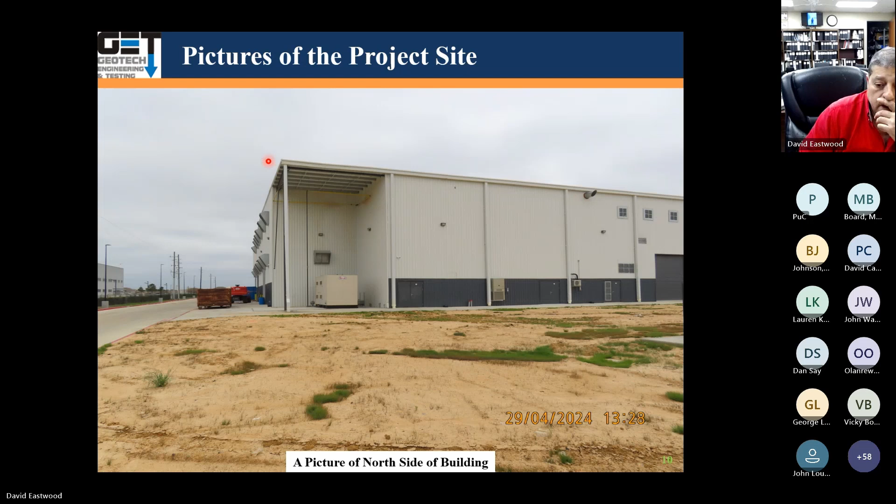Anyway, this is the building, southeast side. That's the north side of the building, and northwest. You can see it's a big metal building.

Project timeline. The agenda today is project timeline, site visit, field exploration, results of laboratory tests, engineering analysis, reasons for foundation distress, repair techniques, and recommendations for additional studies for this project.

The owner came to us on this project and told us, hey, we've got a building where the floor slab is all cracked up, and we're going to have problems operating on these floor slabs. What caused it, and how do we fix it? So we went out there and looked at the paperwork on the project.

September 11, 2020, they did the architectural drawings. The civil drawings came out in May of 2021. In August, the specifications for construction of the manufacturing building were put together. January 2022, construction started - that's important. In 2022, it was kind of a drought year; they didn't have that much rain. July 2022, structural drawings were completed, and construction was completed in August 2023.

February 2024, Geotech Engineering and Testing was engaged to work on the project.

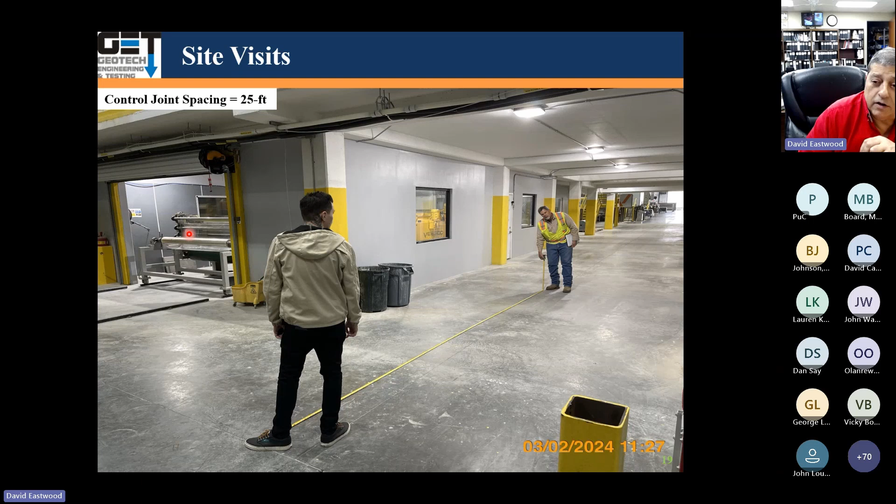Specs called for a maximum of 20 feet spacing. We measured joint spacing of 25 feet in a lot of locations, and of course the higher the spacing of the control joints, the more potential for floor slab cracking. Here, in this one, it's about 25 feet.

There were a lot of loads out there on the floor slabs - these are heavy items filled with rock, sitting on the floor slabs. They have a contact pressure of about 600 psf. We calculated the settlement - it was not that heavy.

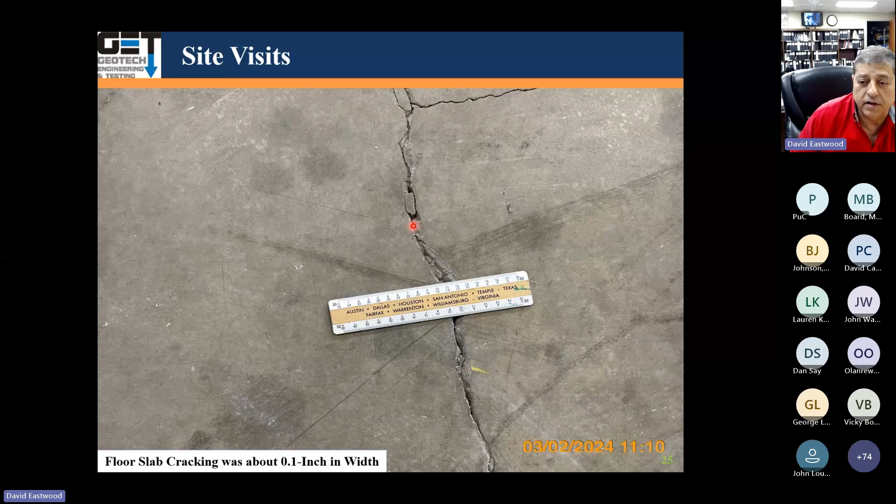A lot of floor slab cracking. You go through the whole floor slab area and you can see cracks all over the place - just cracks throughout the whole floor slab areas.

Crack, crack, crack, all the way from hairline to about 0.1 inch. Essentially, this building was only about 2 years old and just kind of falling apart.

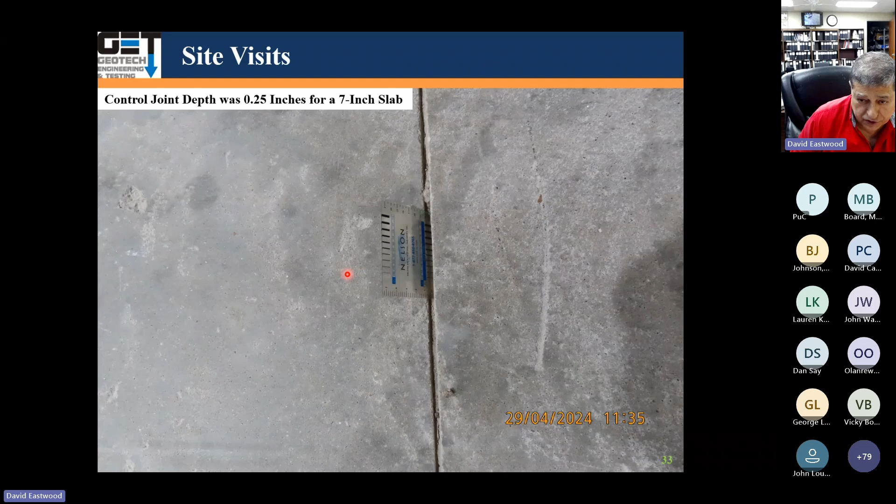Control joint depth was 0.25 inches. As we know, the control joint depth should be one-quarter of the floor slab thickness. The slab here was 7 inches, so it should have been more than 1.5 inches deep, but it was only 0.25 inches.

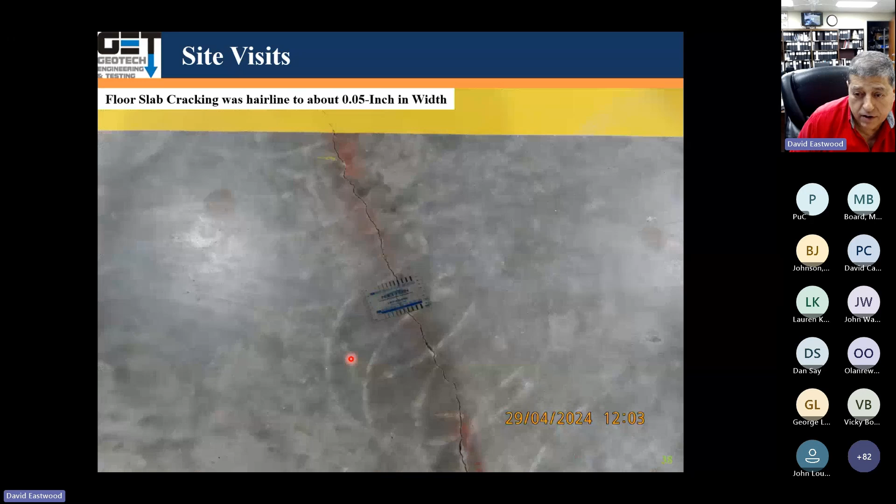Now, ACI has specs on control joints for industrial buildings, and I'm going to talk about that in a minute.

More cracks, more separations of the control joints, more cracks.

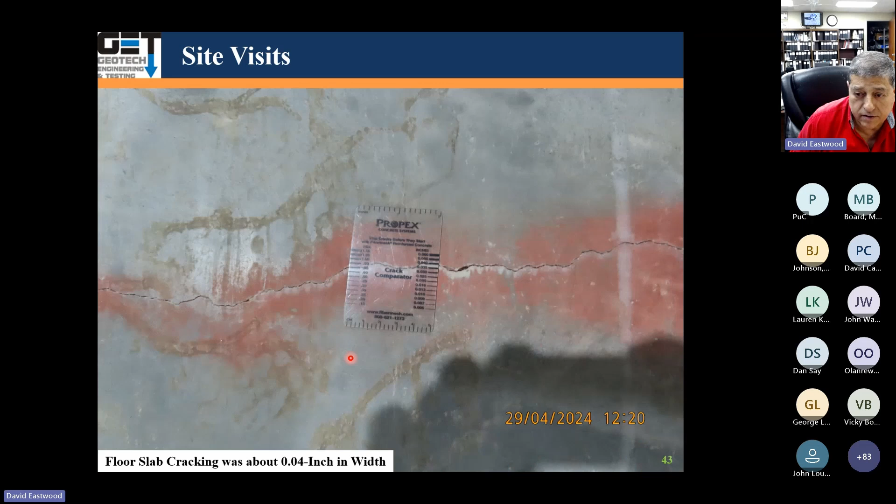So we monitored this, trying to see if this press machine's vibration was causing concrete cracking.

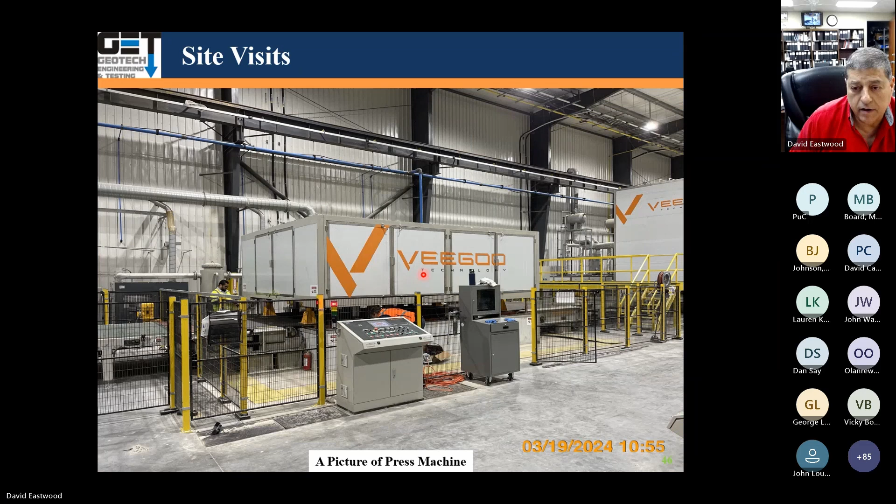Looking at the foundation system for the control machine, for the press machine, it's basically sitting on a concrete mat foundation, having foam rubber in between its foundation and the rest of the foundation of the building to increase damping of the vibration. So that's kind of like an isolation joint and damping material.

Also, they had an oven on the project, and the oven had a basement. You had to go in there. It was hot in there, and all the walls were leaking. You go inside, look at the walls, and all the water is leaking in the basement. The walls, the water was just leaking inside the floor slabs.

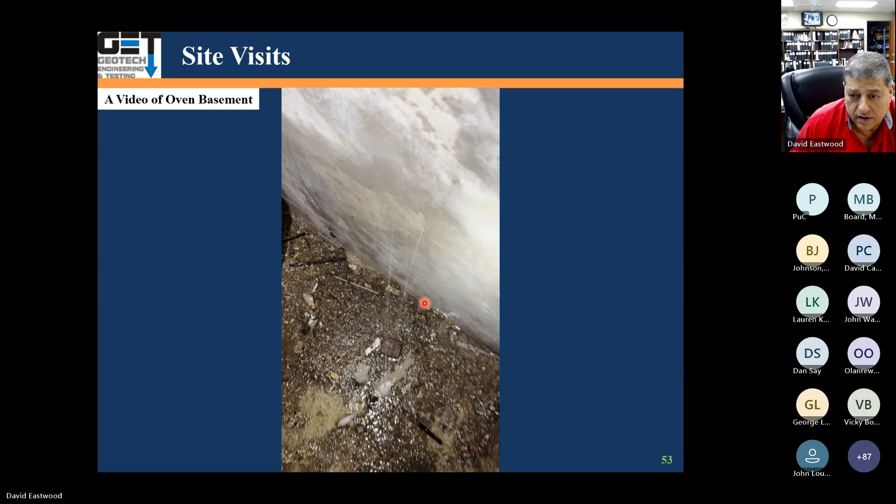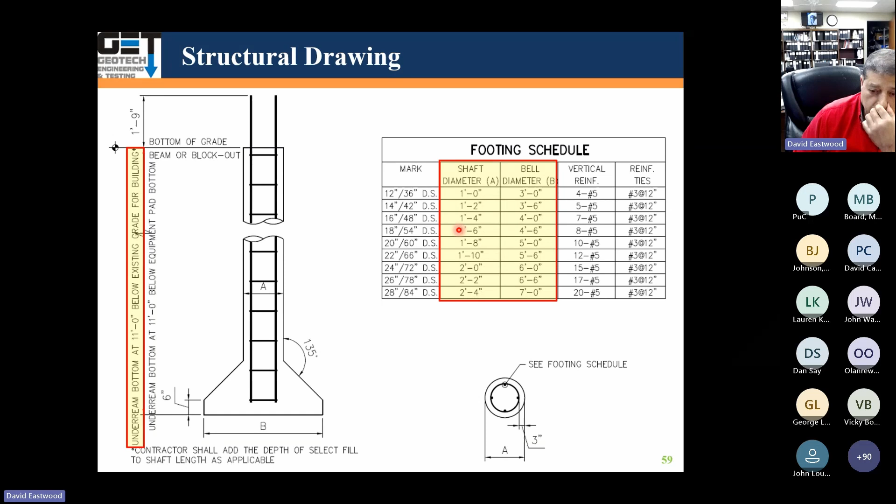And then the slab itself, which is critical here, was supposed to be 7 inches with number 4 at 15-inch spacing, reinforcing in the floor slab areas. And here it says in the spec, building placed control joints at maximum of 20 feet. And of course, we measured at many locations that the control joints were measured more than 20 feet.

So we went out there, did some investigation of the floor slabs. We did some drilling, sampling. We did ground penetrating radar, GPR. We did micro elevations. We did vibration monitoring with geophones. We're putting piezometers in there to see where the water is underneath the floor slabs, and we did the crack survey.

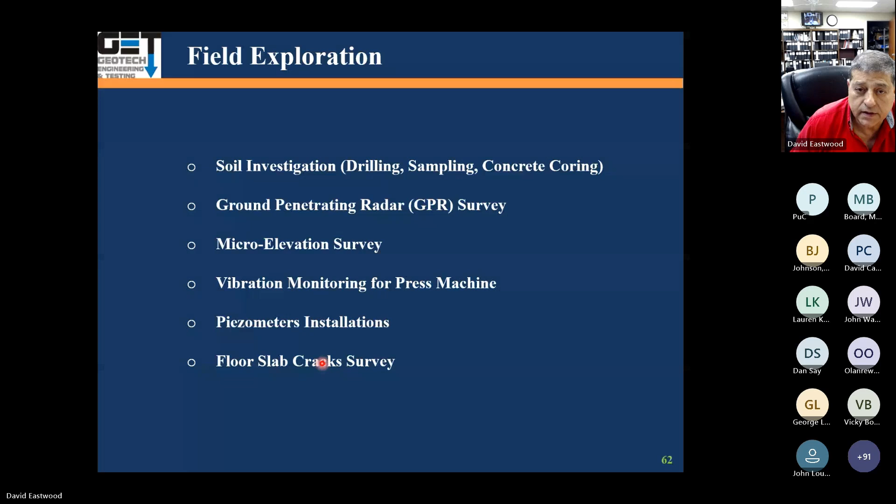So when we did our borings on the building, we did 4 borings, 25 foot on the exterior of buildings, and 8 borings inside the building to a depth of 20 feet or where we could get it. We also did GPR inside the building at 8 locations to identify the concrete thickness and rebar layout. Then we did piezometers, 2 of them inside the building. The exterior borings, we had our own rigs going out there doing borings and trying to get samples of the soils with the building. The soils under the building were mostly sandy clay, lean clay type material.

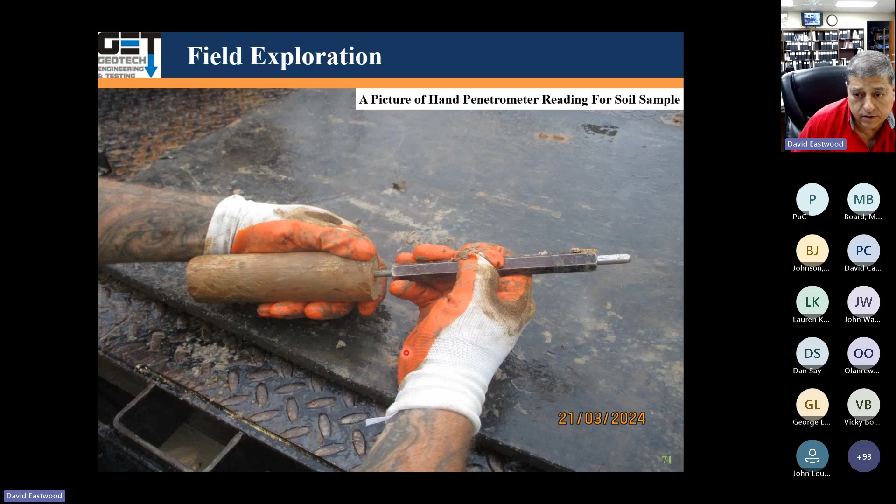They were good soils, non-expansive, with low PI soils. We checked the water level with the tape measure and the weight at the end of it. There was no water all the way down to 20 feet.

With the GPR, it's a device we use a lot in forensics. Basically, we use it for evaluation of presence of underground utilities, damage prevention, if there is any problem with any kind of pipes underneath the building. GPR uses basically an antenna that transmits electromagnetic energy, similar to a cell phone. A receiver is located within the antenna and takes the reflected signal as it encounters soils with 2 different dielectric values.

So GPR was used at 8 locations. Basically, the purpose of it was to identify underground utilities. Also, we wanted to know the thickness of the concrete floor slab and rebar layouts. So also, we did it throughout the whole building to see if there were voids underneath the floor slabs and areas of high moisture.

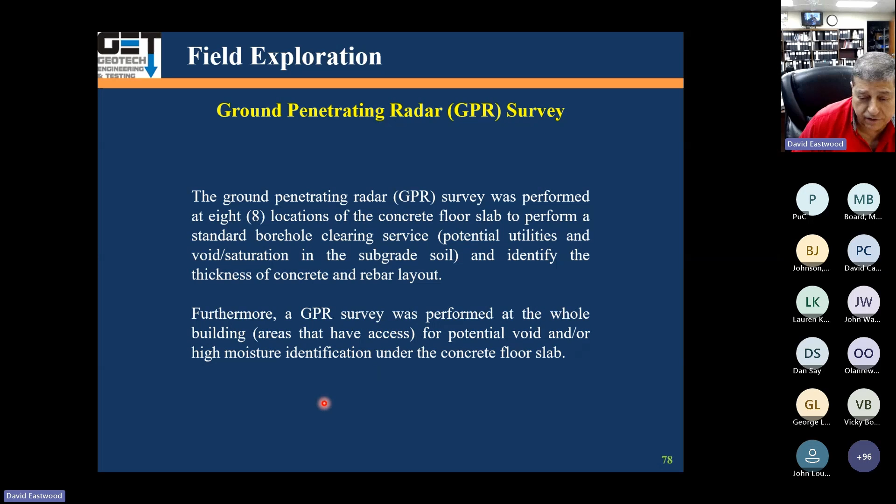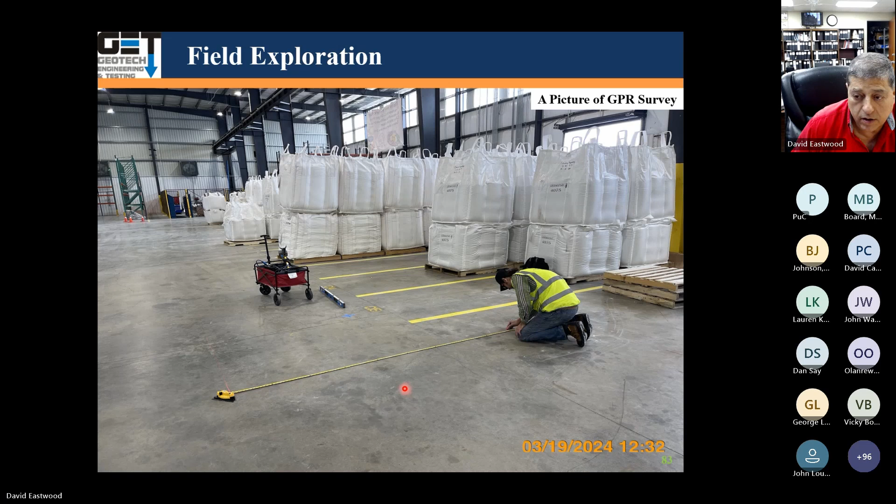This is again more boring locations using GPR, making sure there's no steel here. There's some rebar here. Again, the rebar locations and the boring location here. We don't want to drill where the rebars are.

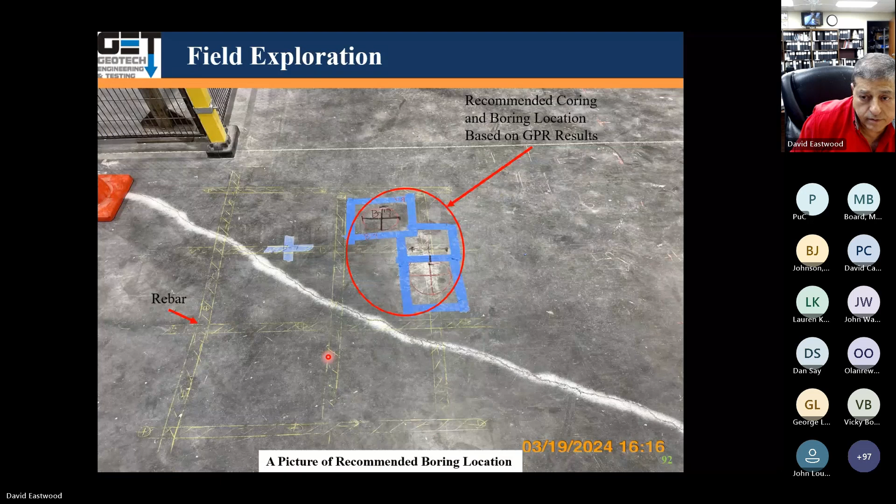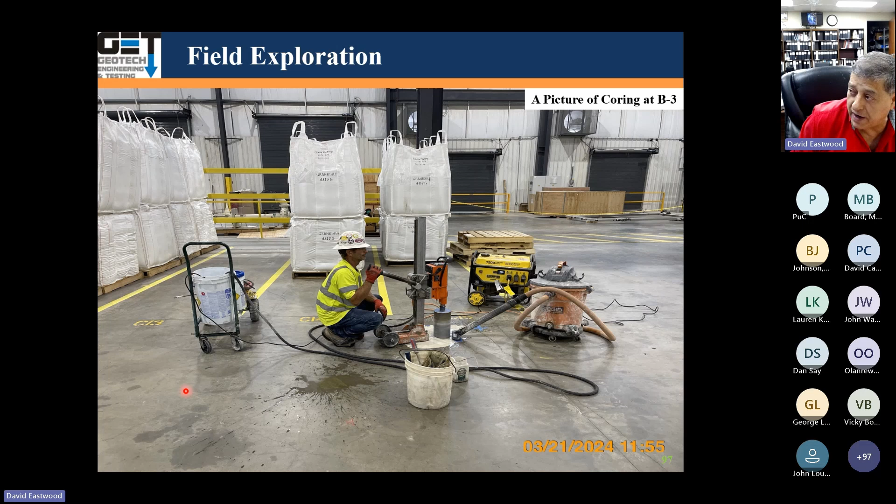So before we did the coring, of course, before we do the borings, we had to do coring out there to evaluate the concrete thickness and get core samples of that concrete to see what's wrong with it. Why is it cracking so much? Then we use our portable rig system.

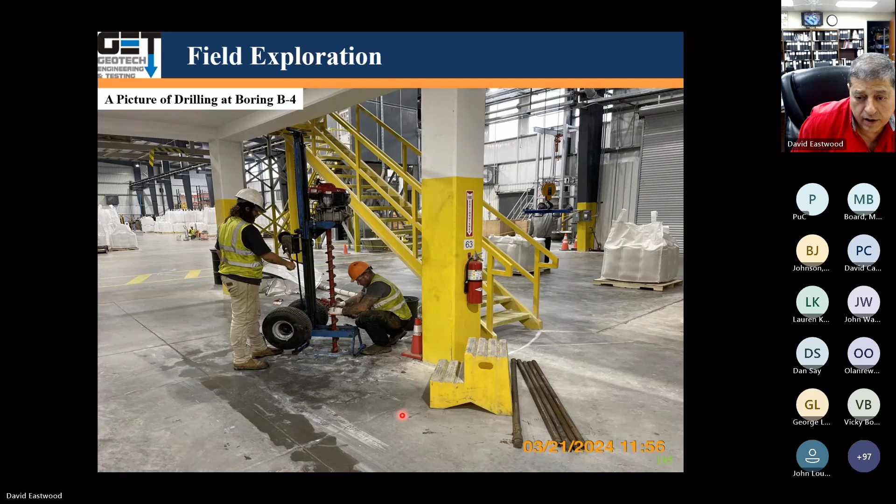This is about 7 foot, 9 foot tall, and we did borings inside the building to a depth of 20 feet, tried to anyway, to get soil samples with our portable rig. It's a gasoline operated rig. It has little fumes, but that's okay.

We measured the water levels in the holes after we did the borings. Let's see, I think he jumped up.

Let's see if I can go back. Something jumped up here. Okay.

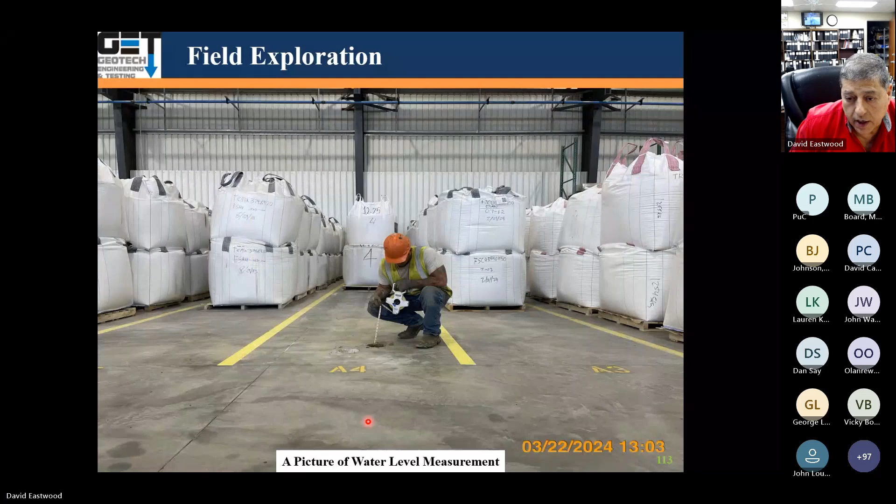Anyway, we measured the water levels and there was no water. We backfilled the holes with grout, basically a bentonite cement mixture.

We'll also install piezometers. Piezometers tell us where the water level is. Basically, two piezometers, PZ1 and PZ2. One of them was next to the oven, the other one was next to the press.

Basically it's a PVC pipe, 2-inch diameter, screen about 10 foot, and above that a regular PVC pipe. We put sand around the screen so the water can flow, then cement and bentonite above it to stop water from the top coming in. So this measures only the groundwater.

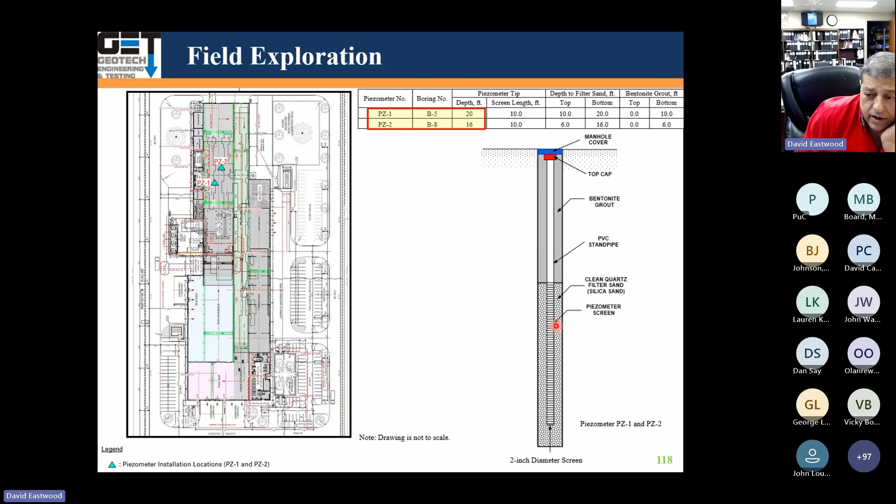Piezometer PZ1 was near the press machine, PZ2 was near the oven. We drilled a hole at the location. These are the PVC pipe, about 2 inches in diameter.

We put sand around it so that the water can flow. This is the cover of the piezometer.

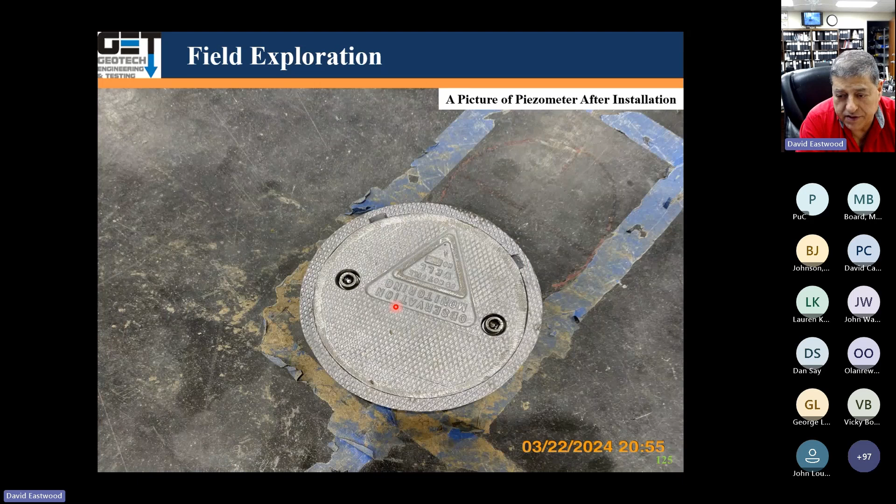We measure the water level in the piezometer. We open up the cap and put a tape measure in there with a weight at the end of it. We measured the water level at 2 different times in 2024, and it was always dry. There was no water in there.

We also did elevations. Micro elevation was obtained basically to evaluate the floor slab deflections, and it was done in accordance with Foundation Performance Association and Post-Tensioning Institute guidelines for the elevations.

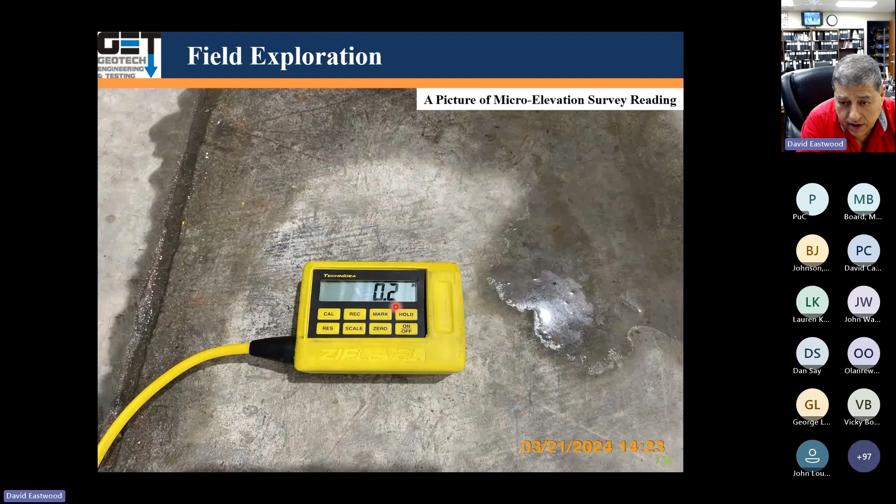This is the ZipLevel measurement device. You put it on the ground and it measures the elevations. We did it throughout the whole 200,000 square foot building, all over the place.

This is near the oven, this is near the press machine. This is the results of the micro elevation data. You can see some areas at 2.4, 2.4, 1.6, 2.0, 1.6, 1.0, 1.2 -- elevations about a couple of inches differential, about 1.5 inches throughout the floor slab areas.

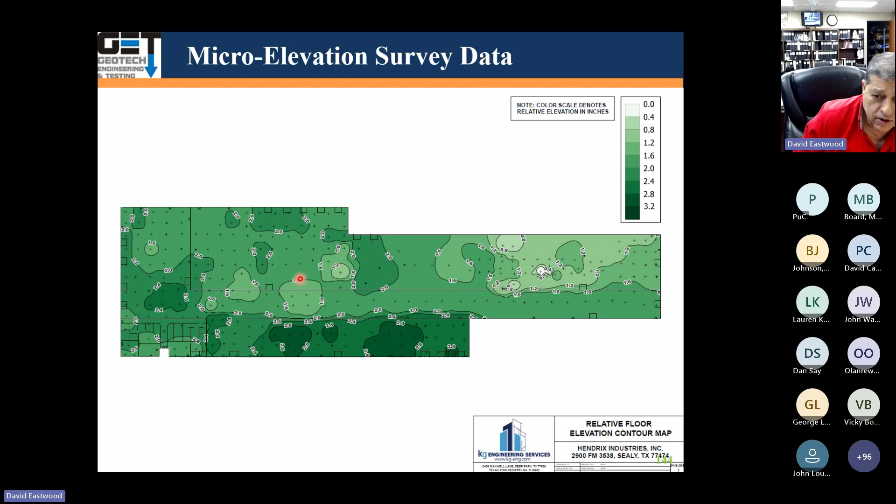2.0, 2.8 -- so it's kind of not very uniform, and we feel like the floor slab was not poured level. That's why you see this change in elevations. This was not because of the presence of expansive soils. There are some expansive soils on the site, but not much.

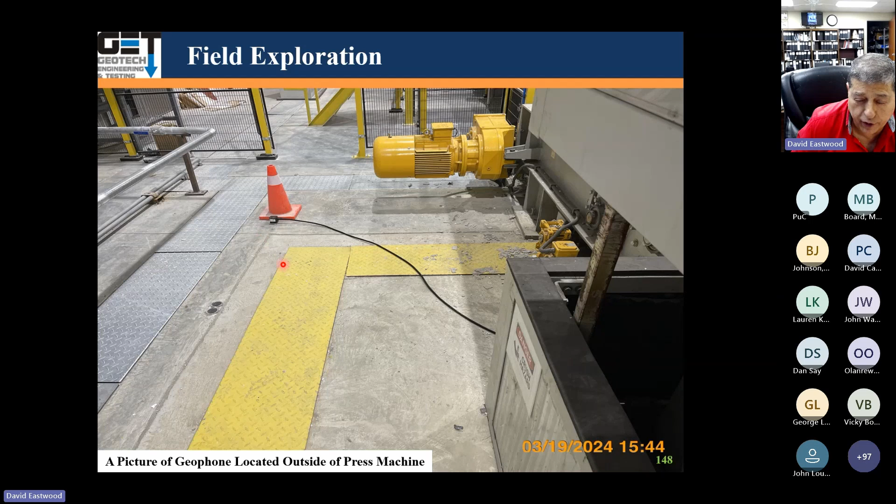Vibration monitoring: as part of our work, we put about 8 geophones around the foundation system of the press machine that was vibrating. That's the press machine, these are geophones. We put them on the foundations of the machine and outside the foundation to see what the difference in vibration is and peak velocity.

So we put one outside the foundation, one inside, one outside. These are the regular floor slabs, this is the press machine foundation. We had 4 of them on the press machine and 4 outside, to see what kind of difference we get in vibration.

These are geophones we put in at various locations -- that's the machine base. This is the actual foundation system for the building outside the isolation joint barrier for the machine. Again, this one is at the machine base.

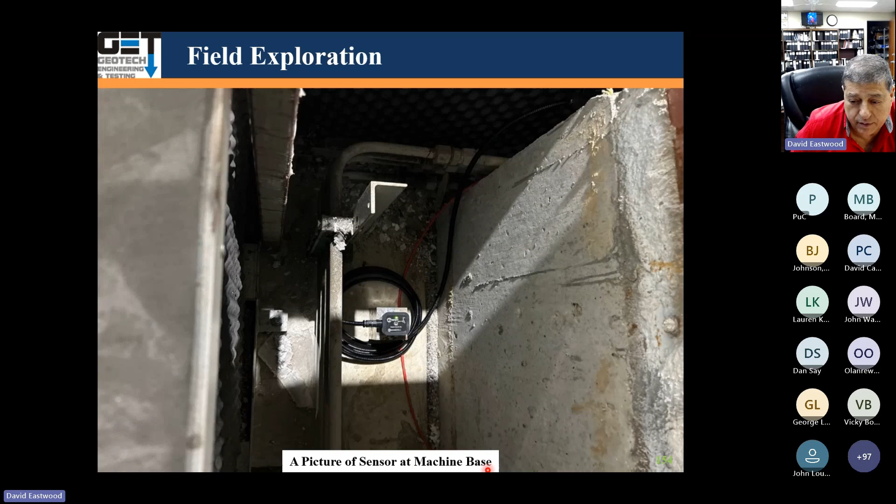Little devices. We also did a crack survey. We went out there throughout the whole building and picked the 40 biggest locations. We measured the cracks -- the length ranged anywhere from 2 feet, 26 feet, 25 feet, 32 feet.

Some of these cracks were pretty long. They were hairline to about 0.1 inch in size.

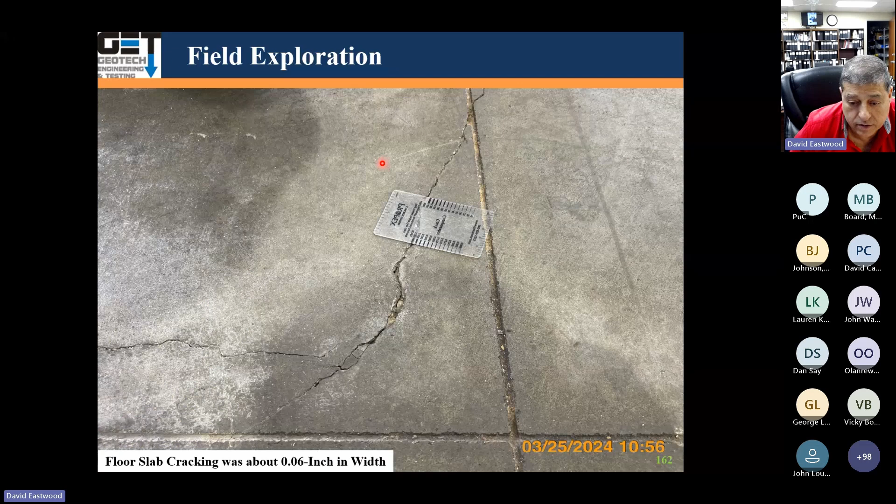Here's measuring the cracking length, 2 feet here. There's the width of about 0.02, 0.04, 0.06. Here's another crack, 18 feet long. Here's another crack -- these cracks were all over the place.

You can see the cracks everywhere. Floor slab cracking, 18 feet. More cracks. That concrete was only a year or two old, and it just had too many cracks everywhere.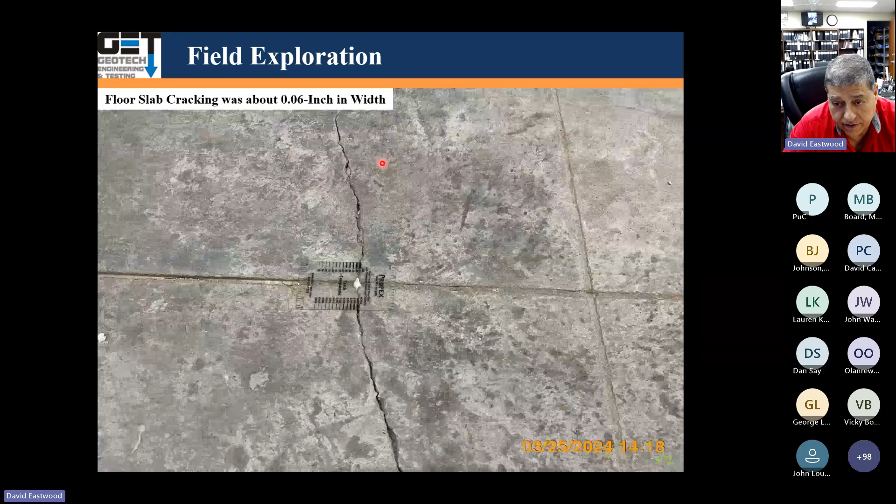They spent millions of dollars on the building. They also had a forklift running around on the floor slabs, but apparently they were not going to use it anymore, and they didn't use it very much. Here are the forklifts.

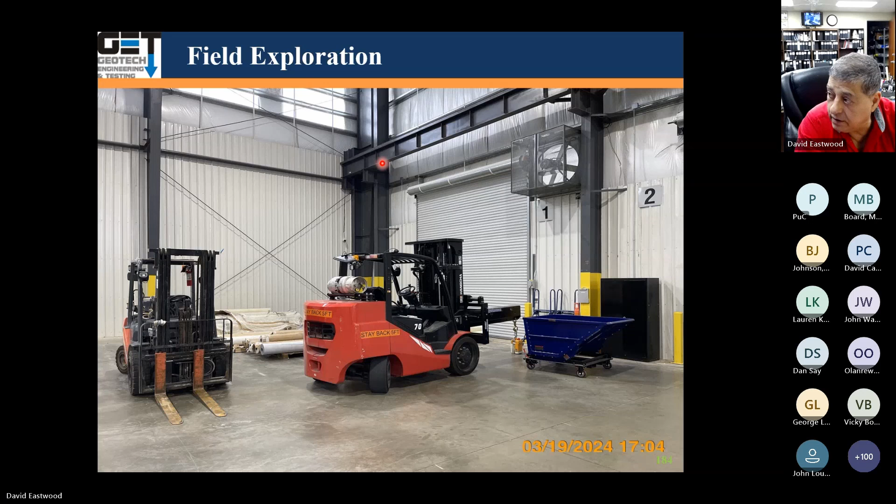Not a very heavy forklift, but he was picking up chunks of materials that they had on the site. This was outside the building. This forklift, they're using it outside the building.

We did a bunch of lab testing: classification tests, strength tests, proctor tests, compaction, density, concrete compression tests, swell tests, and petrographic analysis of the concrete, trying to see what's going on with the soil and the concrete on the project site.

These are the boring logs here, B1, B2, B3, B4. We had concrete on the surface. Below that, we had fill, a couple of feet of fill, maybe 2, 3 feet, up to 4 feet of fill on the site. These are the borings inside the building, B1 all the way through B8. And B8 showed fill all the way down. That was in the area of the oven.

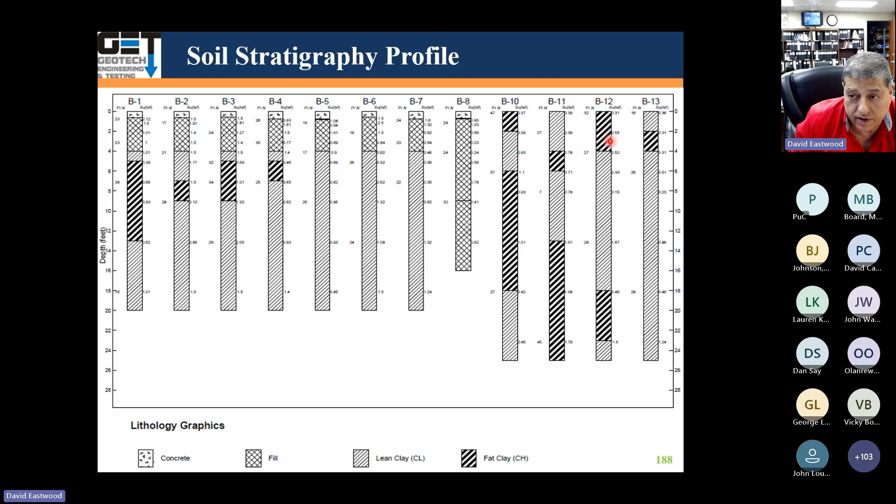Outside boring B10, B11, B12, 13, they had some expansive soils near the surface. Essentially we had 0 to about 7 inches concrete slab. Maximum concrete slab thickness was 9.4 inches. From about half a foot to 16 foot near the oven we had a big excavation. But in general, 0 to 4 feet was fill, soft to hard, brownish, reddish brown, yellow, dark gray, basically lean clay.

Then most of the other areas we had lean clay too. And outside in some areas they had fat clay. The PIs of the lean clay was 16 to 30. The strengths were 0.23 to 2.5, so there was some expansive soils in that lean clay. Here's another lean clay, PI 7 to 28. Fat clay had PIs of 32 to 57.

Looking at the boring logs, we had the concrete slab here in boring B1, 7.8 inches concrete thickness. Below that they had fill all the way down to 4 feet, then lean clay below. The fill had a PI of 23. Below that it had fat clay with a PI of 38. Below that, lean clay. The clay was strong near the surface, and the natural clays were not that strong, 1,000 PSF.

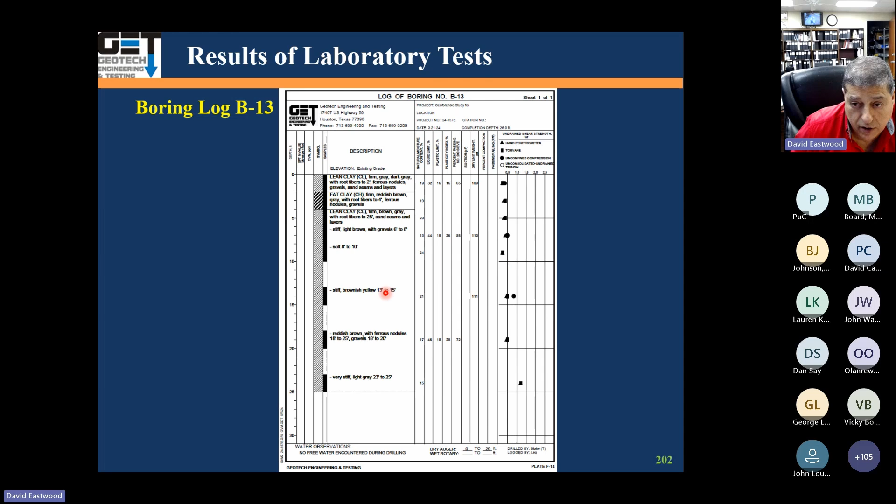We ran that PVR based on Tex-124E on the project site, which indicates on average how much heave you're going to have on the site. The PVR underneath the floor slab areas, based on the interior borings, not the exterior, was about 1.0, which is okay for an industrial building. So we didn't see heave as a major problem here.

We also ran a swell test on the project with the applied overburden, and we saw percent swell maximum average about 0.11%, which is acceptable, basically less than 1 inch PVR. So again, expansive soils was not a major problem on this project.

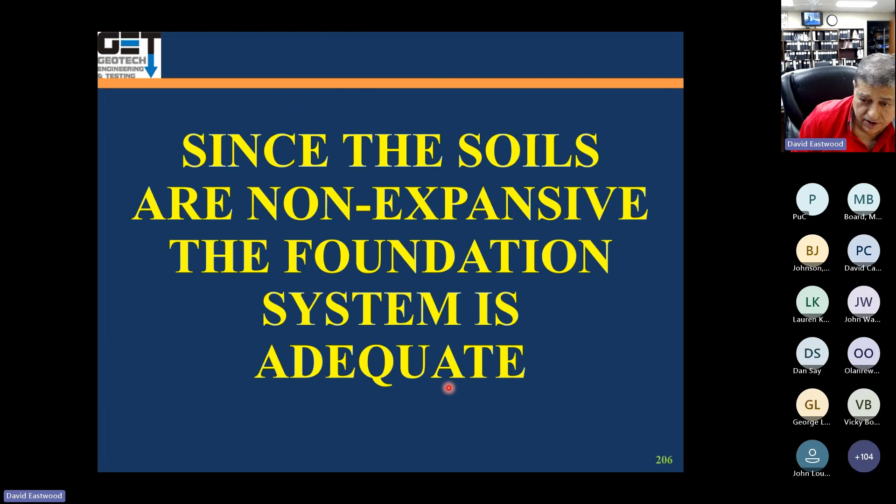Since the soils are non-expansive, the foundation system was adequate. We felt the foundation system with the fill was adequate considering the non-expansive soils. We ran Proctor tests for compaction. We had optimum maximum dry density 117, optimum moisture 13%, PI of 17 on the fill.

So this is a lean clay again, running another Proctor test. In the fill, the PI of 20, 113, and optimum moisture of 14. Essentially, density for all the fill underneath the floor slab passed.

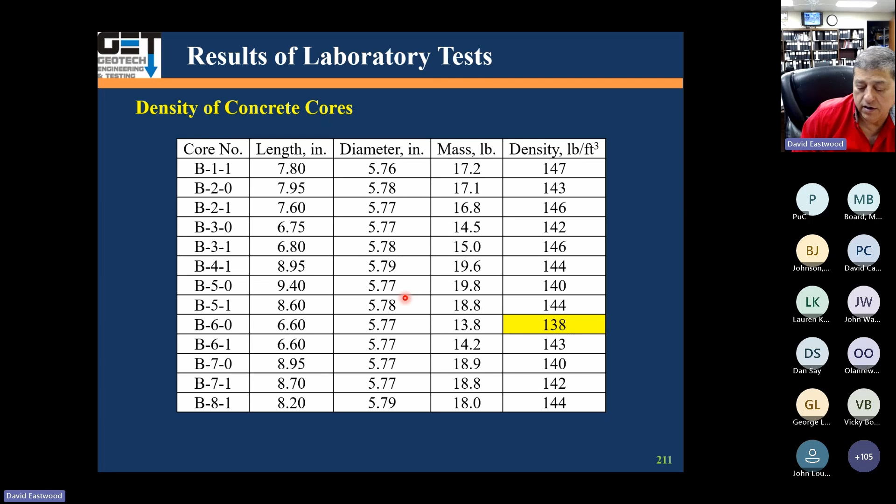We ran density tests on the cores we got from the concrete. We got numbers of 147 all the way down to 138. Typical concrete cores usually have a density of about 150 PCF, but the density on the concrete in some areas was low.

Compression tests: we took these concrete cores, cut the ends and capped them, put them in the machine, and started breaking them. The concrete crumbled and cracked. This was done at various boring locations throughout the building, and we broke the concrete.

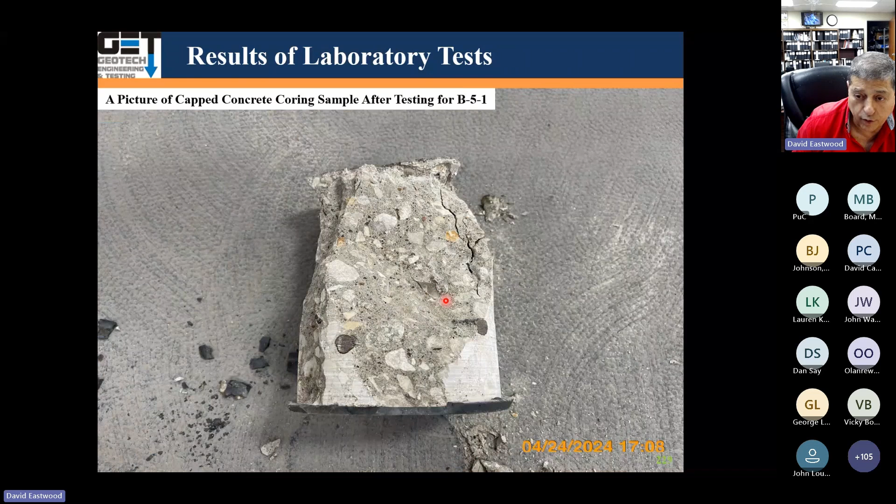You can see pictures of cracked concrete, all the cores we got, all the way from boring B1 through boring B8. We got compressive strengths all the way from 4,990 to 1,680. The design was 4,000 psi at 28 days, so we had some areas where the concrete strength failed.

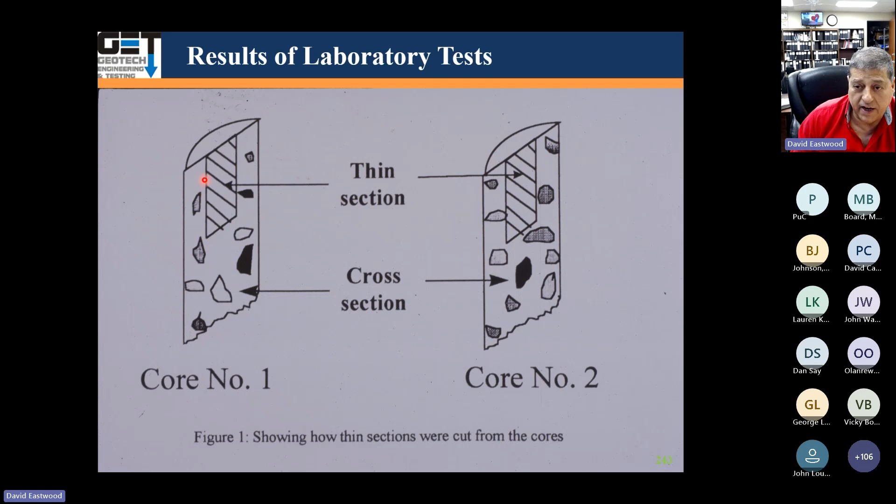We also did a petrographic analysis of the concrete according to ASTM standard 857, or 856. We got a slice of a concrete core, took the cores here, cut a little slice of it like that. We put it under the microscope with blue dye, and you can see the aggregates all cracked up.

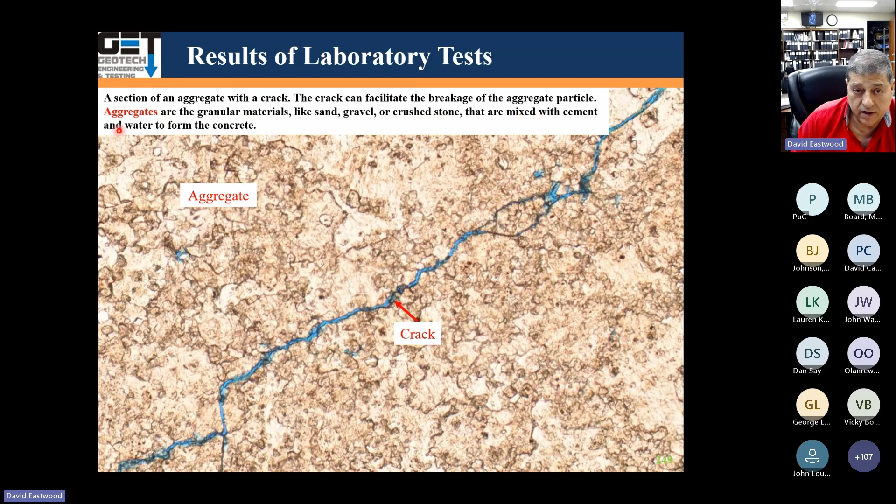Basically, the aggregates are granular material like sand, gravel, crushed stone mixed with cement. There's a lot of cracks in there. We saw various things on the slides. The black is the cement paste, the red stuff is the aggregates, and there's a void in there.

In the concrete mix, here's another one. They got basically the brownish areas of fine grade mineral crystals chipped off, creating voids. The cement paste is uniformly dense and covers fine particles. The blue circles shown on the left are entrained air.

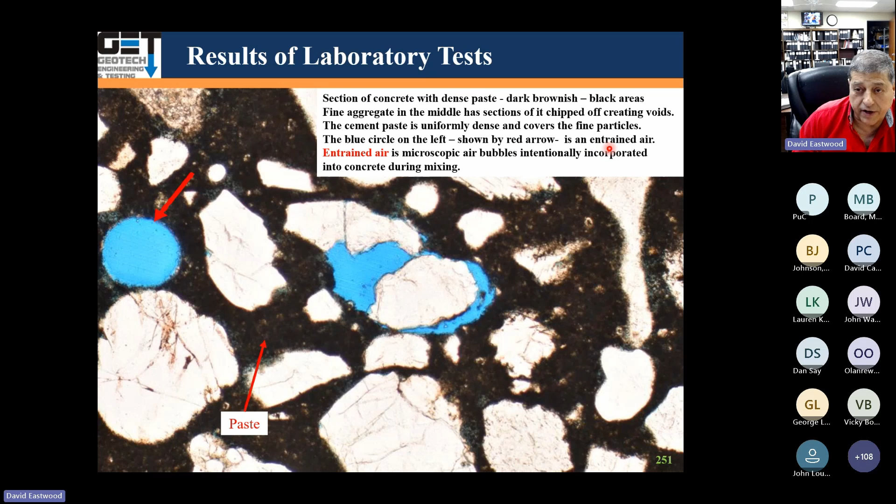Looking at it, the aggregate was chert here, surrounded by porous paste. The tempered concrete showing porous paste means that the concrete had a lot of water in it, and water was added in. Poor quality aggregate was used on the project, as there was a shortage of aggregate, so they were using aggregate that was not high quality.

For engineering analysis, we look at the aerial photos, the topographic map, the elevations, floor slab cracking, vibration, field compaction evaluation, and presence of a perched water table under the foundation system. We look at the moisture profile and liquidity index, and review the rainfall data.

We look at the GPR data, the concrete core densities, and concrete steel placement. We evaluate the concrete floor slab strength, controlled joint evaluation, slab thickness evaluation, petrographic analysis of concrete samples, recommendations on concrete slab thickness, and settlement analysis.

Looking at the aerial photo, the area was as flat as a pancake. There was just no topography. It was a good site, there was nothing on it, no ponds, no excavations. Work started on it in 2022.

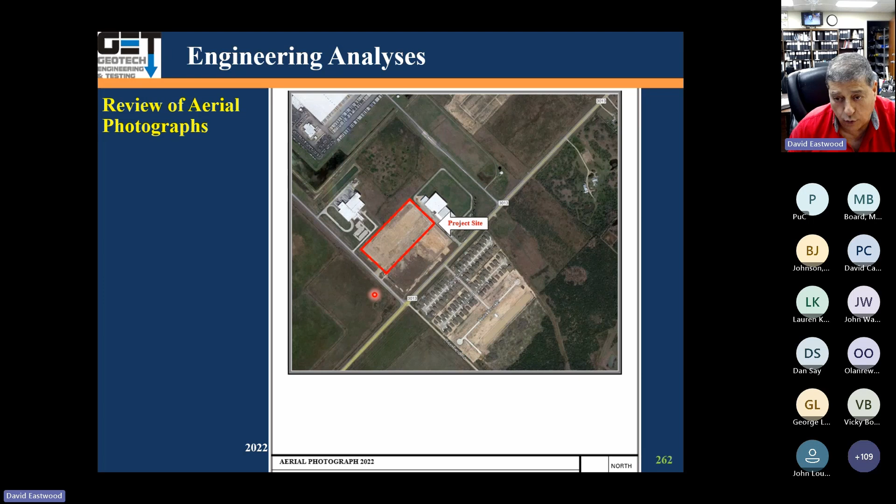Starts clearing it. This is the topographic map, showing no elevation change. We look at the elevations on the project based on PTI, Post-Tensioning Institute, to see if the floor slab elevation is out of code.

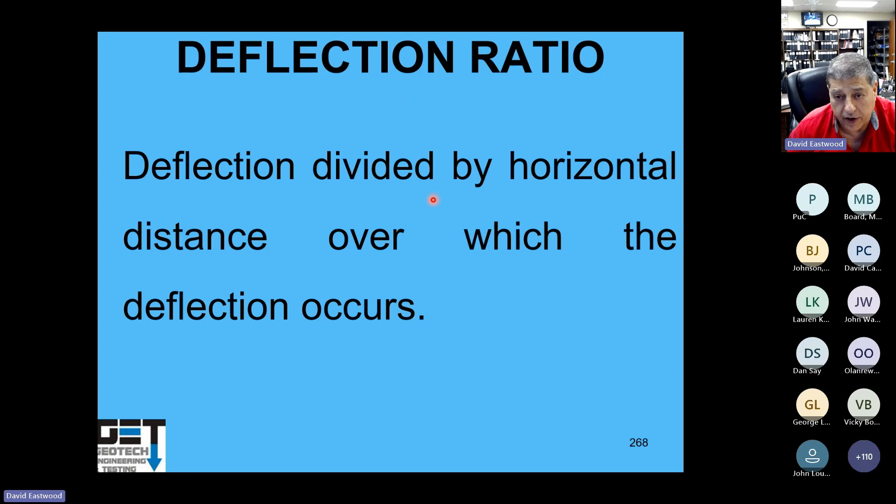Here's some definitions. Deformation is a change in shape of the foundation after the original foundation construction, called deformation. Deflection is the maximum deviation from a straight line between two points. Deflection divided by the horizontal distance over which the deflection occurs is called the deflection ratio.

There's another concept called tilt. Tilt is basically a planar rotation measured over the length or width of the foundation. So if you've got a rigid slab that moves, Y is the deflection over the distance, called Y over X, called tilt. TRCC, Texas Residential Construction, and ASCE say basically up to 1% tilt is acceptable.

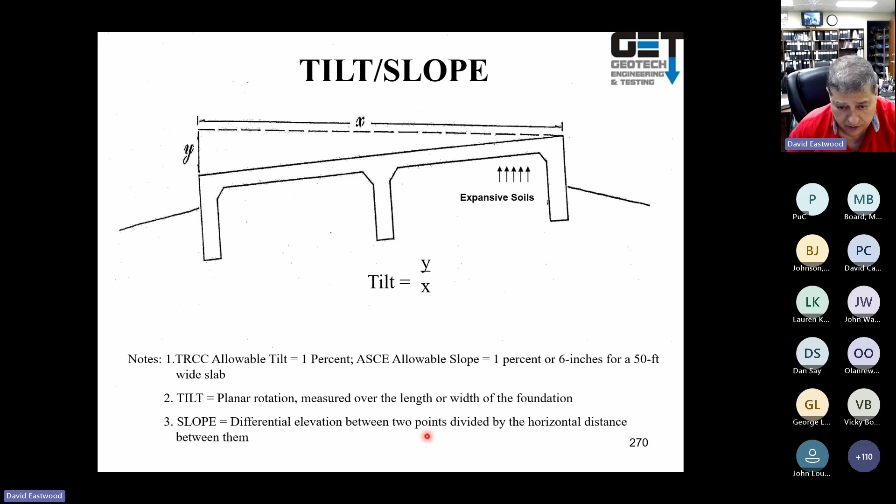There's another concept called slope, which is the differential elevation between any two points divided by the horizontal distance between them. So we say the typical acceptable criteria for a floor slab is L over 360, which is 1 inch in 30 feet in deflection.

And look at the floor slab deflection and check the criteria. We got deflections of L over 706, L over 835, which were real small, less than 1%. So it all passed. Tilt was 0.07%, it passed.

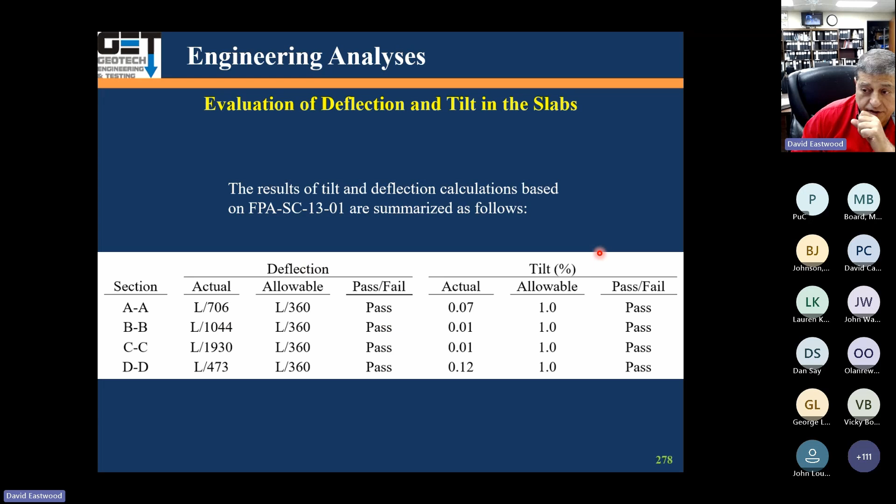This is DD, that's a floor slab deflection here. We measured the deflection - L over 474, 73, 510, anything above 360 passes. Tilt was 0.12%, passes. So sections AA, BB, CC, DD - looking at these sections, deflection all pass, tilt less than 1%, all pass.

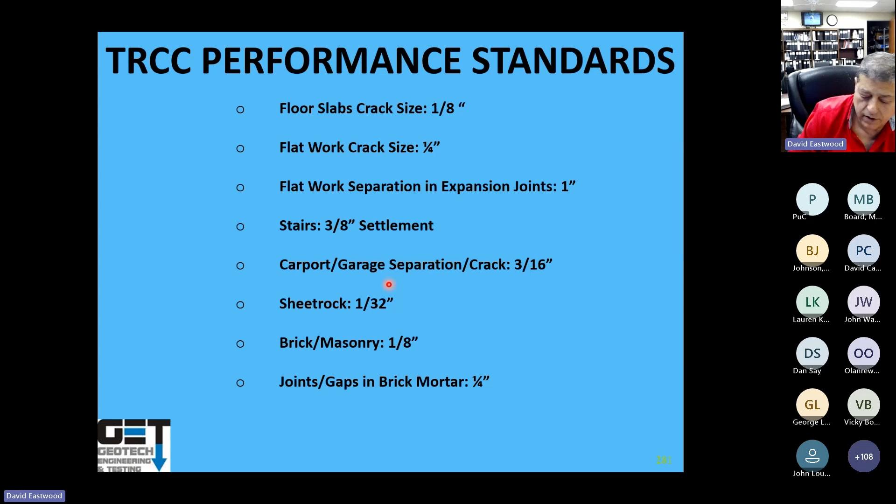TRCC, the Texas Residential Construction Commission, has requirements for floor slab recommendations that talk about crack sizes. They're not in business anymore, but they give guidance on all the crack sizes: floor slabs 1/8 of an inch, flat work 1/4 of an inch, maximum flat work separation, expansion joints 1 inch, stairs settlement 3/8 of an inch, sheetrock 1/32, brick 1/8. So that's just something to compare to.

Vibration evaluation: we had a press machine that was vibrating, and we looked at the peak velocity in the geophones, the peak velocity and frequency. Looking at the NAVFAC chart for dynamic and allowable movement from vibration, and the frequency and peak velocity, we came up with a peak velocity of about 0.258 inch per second, and a frequency of 50.05 CPS, cycles per second.

That puts us at near severe to persons. In other words, the vibrations of that press machine were severe, but below the limit that would be a caution or danger to structures. It was severe to persons, but this was not detrimental to the foundation system. So the vibration was considered acceptable.

Compaction evaluations: we checked all the compactions in all the borings. They all passed, anywhere from 88% to 100% compaction.

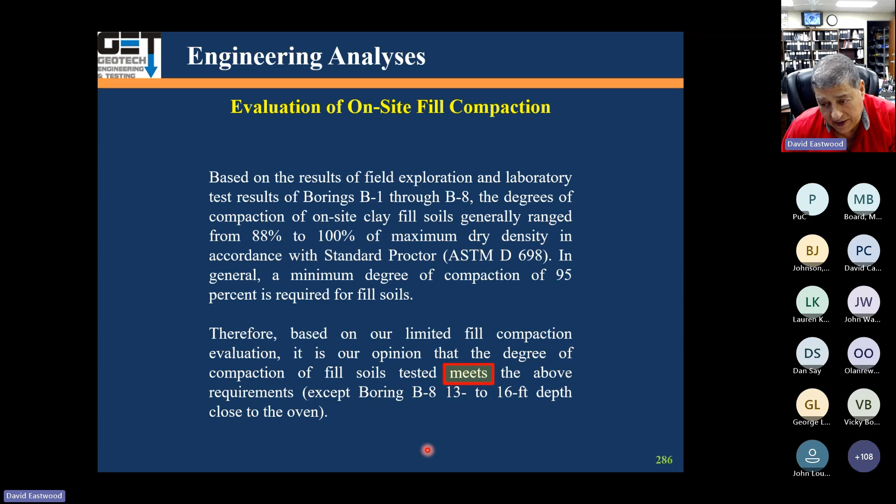Perched water: there was no perched water underneath the floor slabs. There was just no water.

Soil moisture profile: the red ones are the in situ moisture. The green and blue ones are from TxDOT 124 PVR, the wet and dry conditions. You can see the moisture in boring B1 inside the building was pretty dry, below both the wettest and driest conditions. B2 was also pretty dry.

B3 was pretty dry inside the building. B4 was real dry. Again, this is the wet condition and this is the dry condition based on the PVR method, TxDOT 124, and this was below that.

Boring B5, the moisture was close to the dry condition. B6 was close to the dry condition all the way down. B7 was in dry conditions. B8 was a little bit on the wet side, but the rest was dry.

Moisture content at boring B10 was dry. Looking at boring B11, the red areas are dry. B12 was average near the surface, then becomes dry. B13 was near wet near the surface, then dry.

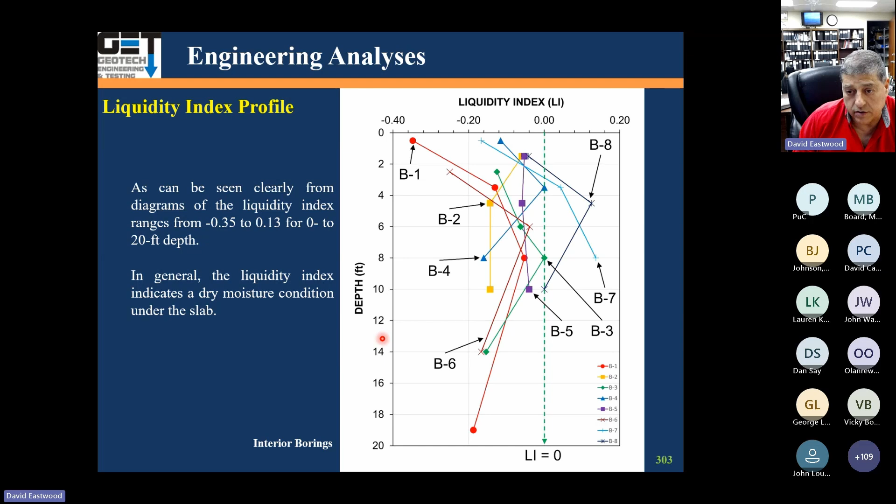We looked at the rainfall data. The building was built in 2022 and 2023. Average rainfall in 2022 was 36 inches, and in 2023 it was 41 inches. Average rainfall in Houston is about 50 inches. So both years, the rainfall was not very significant, and that was not an issue in the construction of this.

GPR: we checked the GPR throughout the whole floor slab and at the boring locations. We ran GPR on the slabs, and near boring B1, for example, the average slab thickness was 8.5 inches, with rebar at 4.5 inches. It was supposed to have been 3.5 inches, and the slab was supposed to be 7 inches. Spacing was 15 by 15, and the spec was also 15 by 15. That's boring B1.

At boring B2, the slab was again 8.5 inches, but the rebar was almost 6 to 7 inches below the top of the concrete—that's not good. Steel spacing was 15 inches, which is fine, but specs call for steel placement at 3.5 inches; here it was all the way at the bottom, 7.5 inches. Here's boring B3.

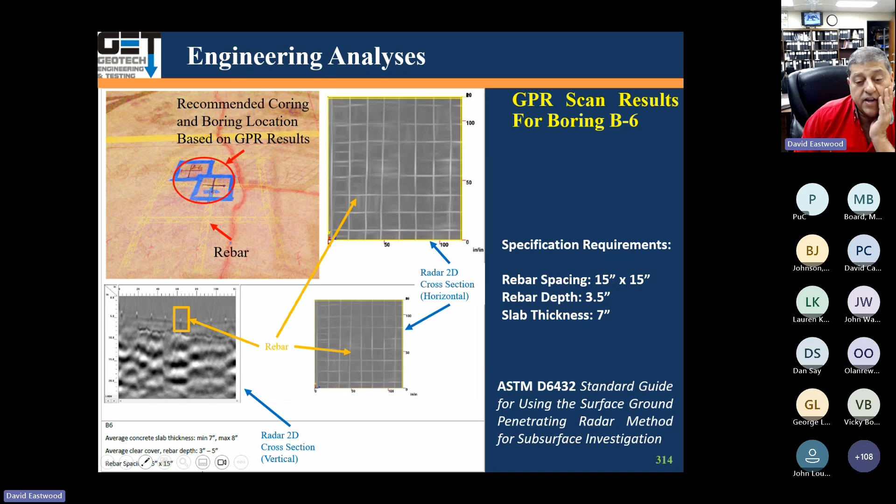Boring B6. Concrete was 7 to 8 inches thick, and the steel was 3 to 5 inches deep, which is okay. B7, 7 to 9 inches concrete thickness. 4 to 6 inches below the top of the concrete was the steel. It's supposed to be 3.5 inches.

B8, concrete was 7 to 10.5 inches in thickness, and it was 4 to 7 inches below grade. Below the top of the concrete is supposed to be 3.5 inches.

So these are the GPR scan areas in the floor slabs. Looking at some of these scan areas, this green area indicates potential for void or changing property in it, about 3 to 5 feet deep in the soil.

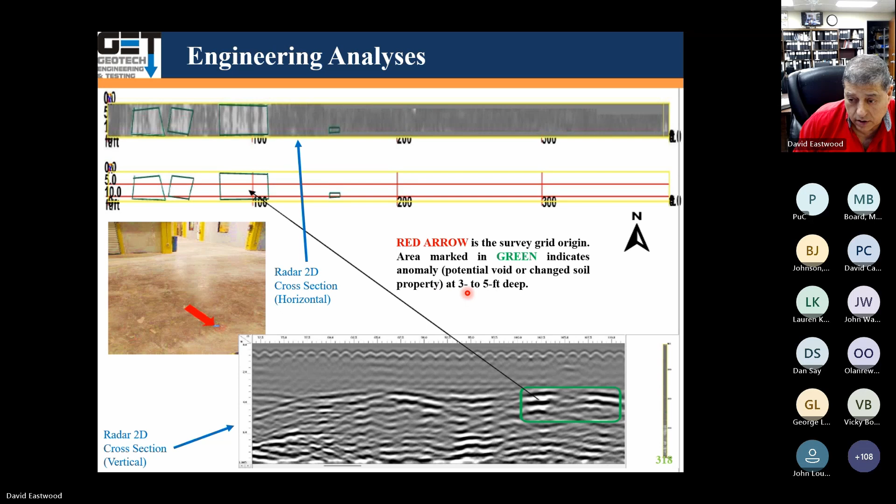Here's another scan area of the floor slab using GPR. Showed somewhere about 2 to 4 feet potential void or change in soil properties again.

Here's another scan in the floor slab area. And here in the pink area indicates below the concrete slab, there's a separation between the soil and the concrete floor slab.

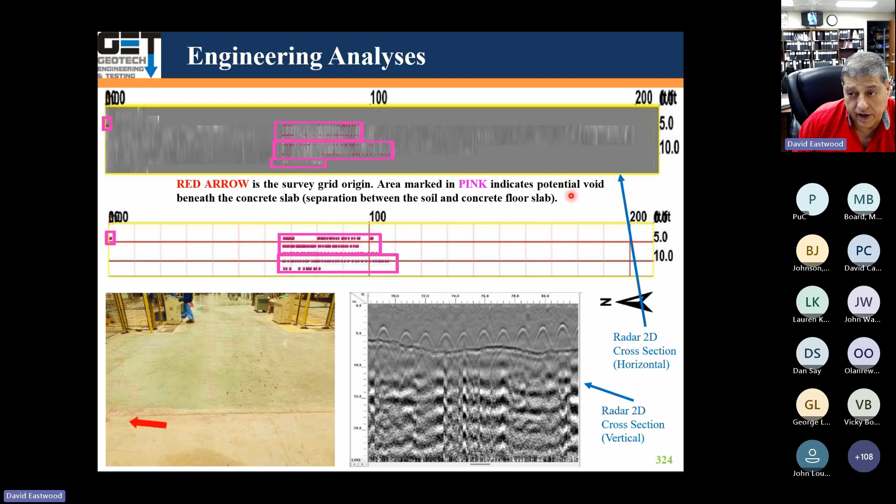Here's another scan area of the GPR. Again, the red arrow. Basically, the pink area indicates a void beneath the concrete slab.

So looking at this GPR areas throughout the floor slabs, there are some indications of maybe there is some anomaly of potential voids in the soil.

And here's another one. The green area indicates potential void with changing properties of the soils at a depth of about 3.5 foot below the pad.

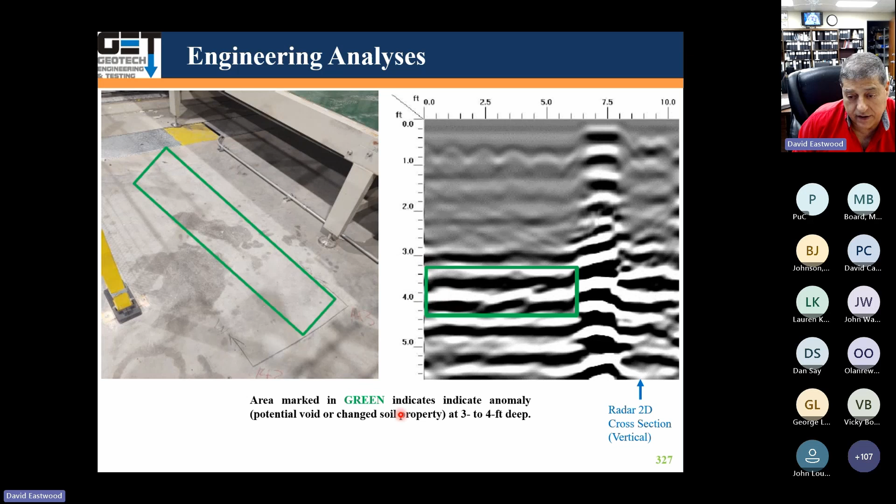Here's another GPR area. That's a GPR location, about 3 to 4 feet, 5 feet. This area indicates potential void.

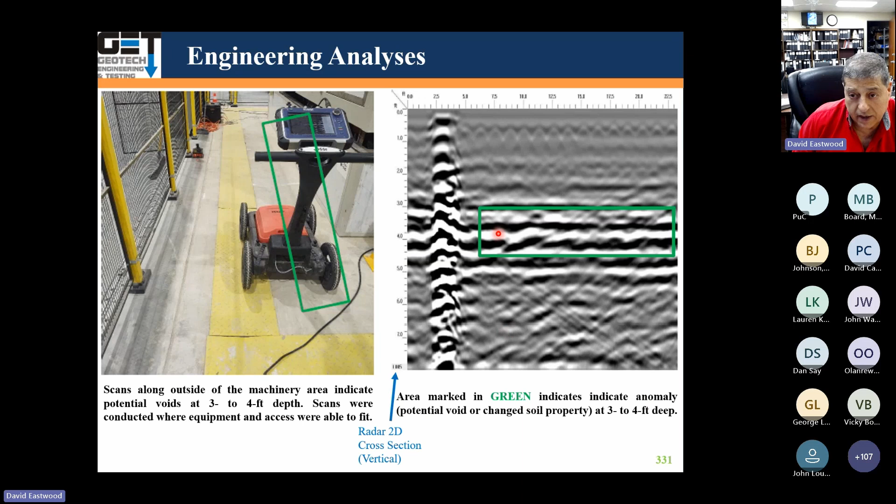So here's the GPR again on this location. This area indicates anomaly, potential void at the depth of 4 feet. So GPR at various locations indicates potential void.

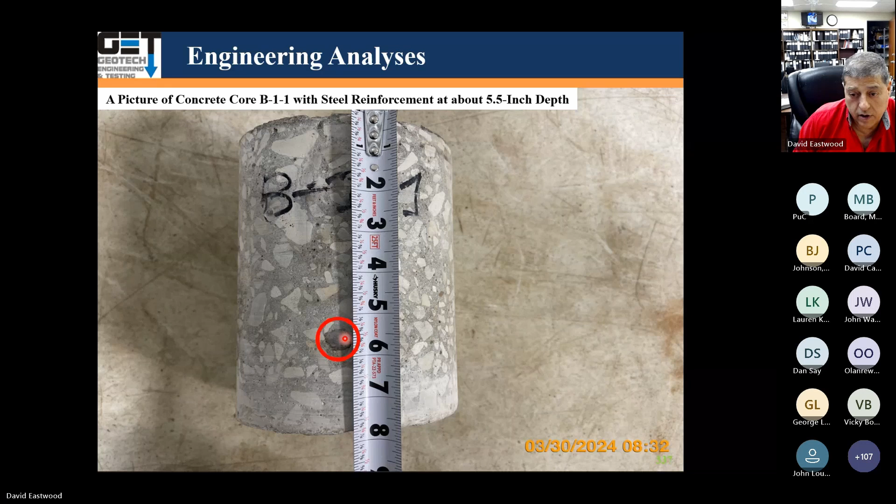Concrete steel locations. When we core the slab, these are the cores, the steel in there. Here's at 5.5 inches below the top, near the bottom of the core. Here is the 6.5 inches where the steel is. It's supposed to be 3.5 inches deep.

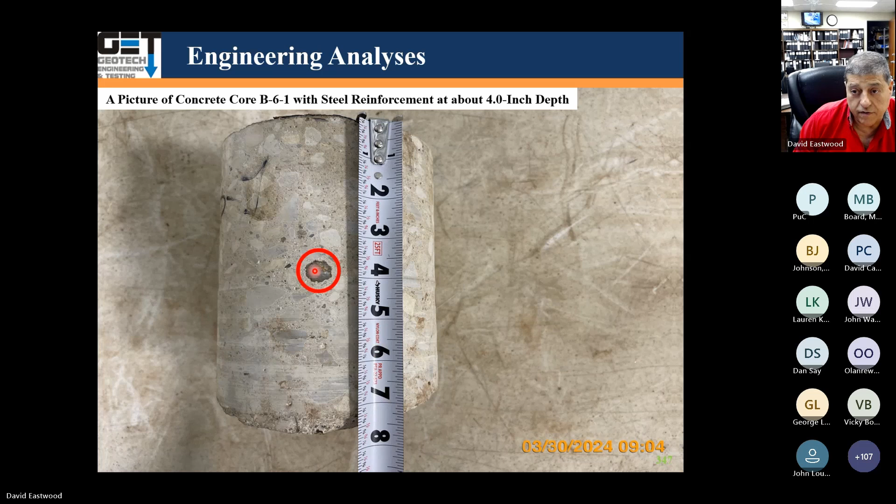Here's the core at 7 inches, the steel location. Here's the core at 7.5 inches. Here's at 5 inches. Here's at 5.5 inches. Here's at 6.5 inches, 7 inches, 6.5 inches, 7 inches, 4 inches, 4.5 inches, 5 inches, 5.5 inches, 6 inches, 6.5 inches. So it was supposed to be 3.5 inches from the top of the concrete.

So we saw this concrete steel location was near the bottom of the concrete cores.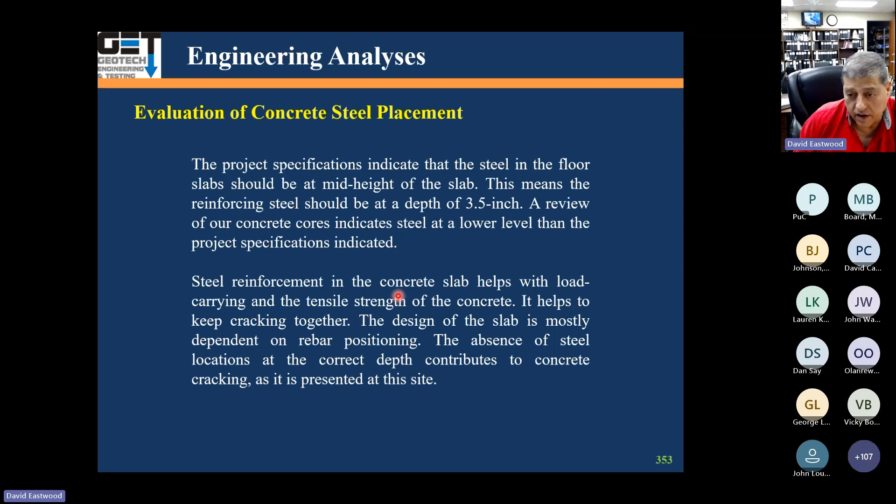Concrete floor slab strength. We measured them all the way. Supposed to be 4,000 psi at 28 days. We measured 5,000, 4990, and we got 2,500 all the way down to 1680. These are concrete cores we broke.

ACI says concrete represented by the cores are considered adequate if three cores equal at least 85% average of F prime C, and no single core drops below 75% F prime C. Looking at these cores, the design was 4,000 psi, 75% would be 3,000, nothing should drop below that. Average of the three cores should be 3,400. So concrete here based on ACI fails.

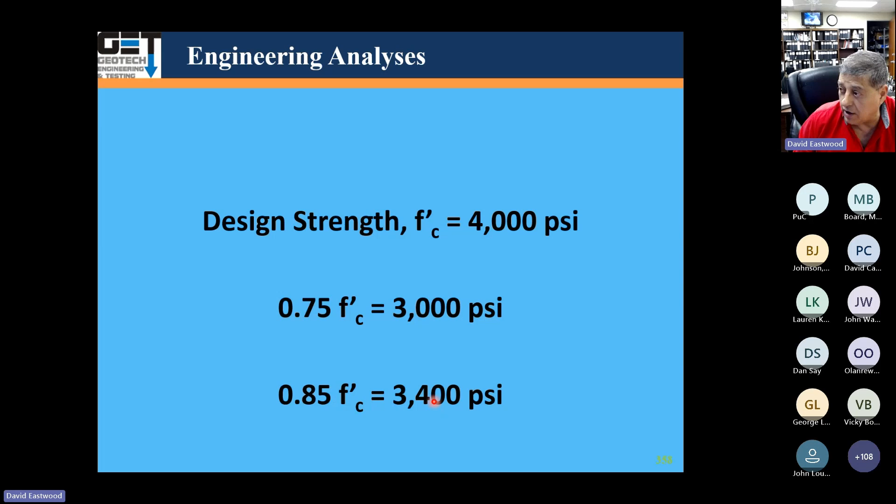We saw cut 1/4 of the floor slab. If the floor slab is 7 inches, you saw cut 1.75 inches. It tells the concrete where to crack below it.

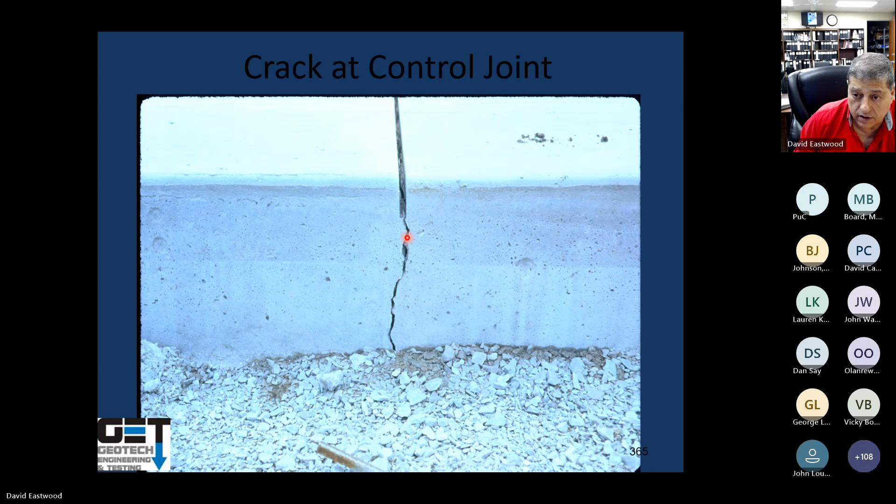So when we look at the control joints here, they were all the way down up to about 25 foot in spacing. And if you look at the control joints, basically they tell the concrete where to crack and control cracking of the floor slabs.

And ACI talks about the spacing of the control joints should be anywhere around 14 to 21 feet. We recommend control joints of 15 feet on this site, and we found control joints as much as 25 foot spacing. The control joint depth should be about 1.75 inches.

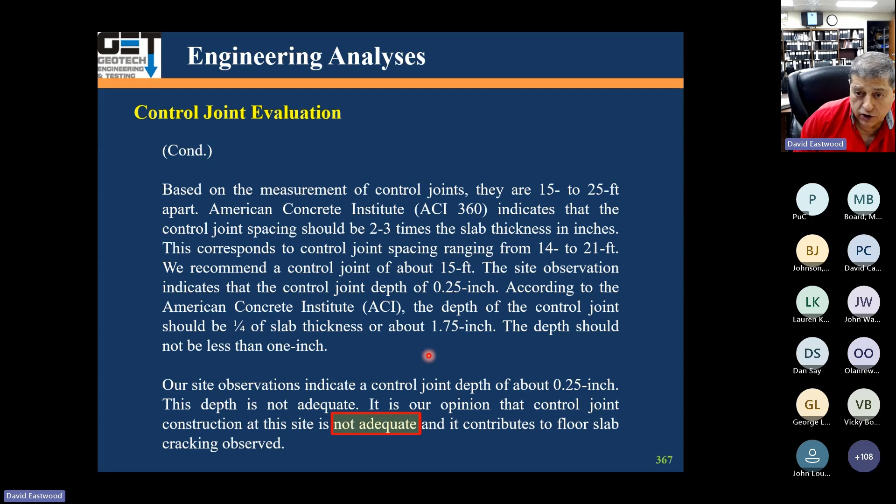We found many locations where the control joint depth was 0.25 inches. So the control joint placement in the floor slabs was inadequate for crack control.

Slab thickness recommendations: ACI says the floor slab should not be thinner than 0.25 inches of the design, and thicker than 3/8 of an inch of the design. So if your design is 7 inches, it should be in the range of 6.75 to 7.38 inches, but the floor slab thicknesses went all over the place, so it doesn't meet ACI 117.

Petrographic analysis: when we look at the aggregates, they used cheap, weak aggregates, weathered limestone used with other inferior aggregates such as chert and mudstone. They couldn't find good aggregates, so they used chert, mudstone, and basically weathered limestone.

And they added a bunch of water during construction, called retempering. Retempering is a process of changing the consistency of the concrete by adding water and remixing.

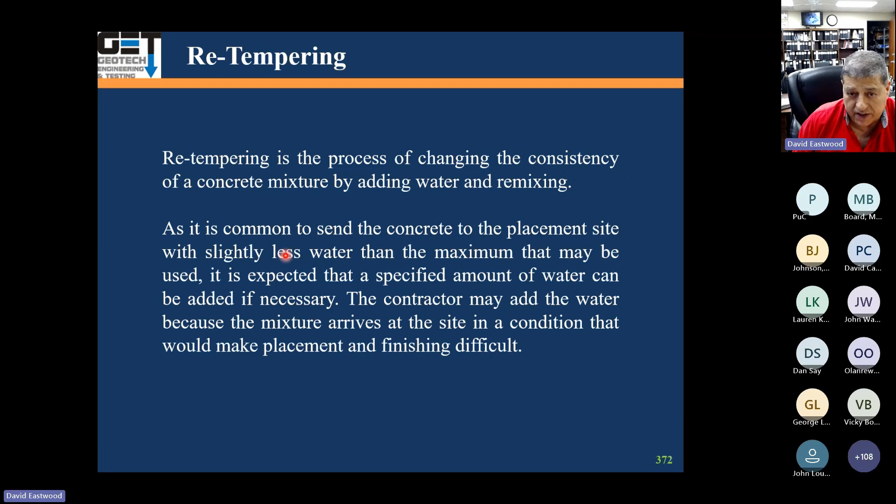Recommendations for the concrete slab thickness. There was a forklift out there on this site. We checked the forklift - if they use the forklift a lot, 7-inch concrete is not adequate. They used it on this project.

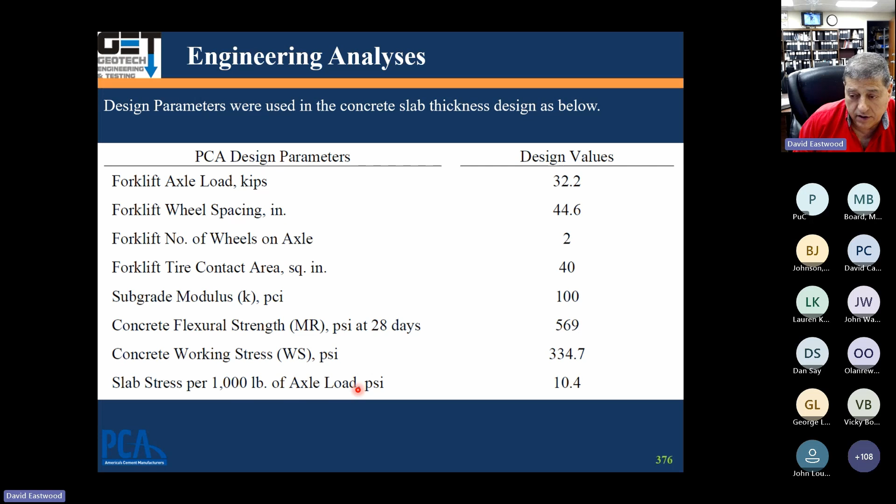So these forklifts were picking up heavy countertops. We ran the design value based on PCA, the Portland Cement Association, looking at the forklift axle load, wheel spacing, number of wheels, axle stress, and went to the chart showing stress per 1,000 pound axle load PSI, along with the wheel spacing.

Based on that, we determined the floor slab really should have been 10 inches if they wanted to use a forklift on this site. But they said they didn't use the forklift very much, so I said then 7-inch concrete is adequate.

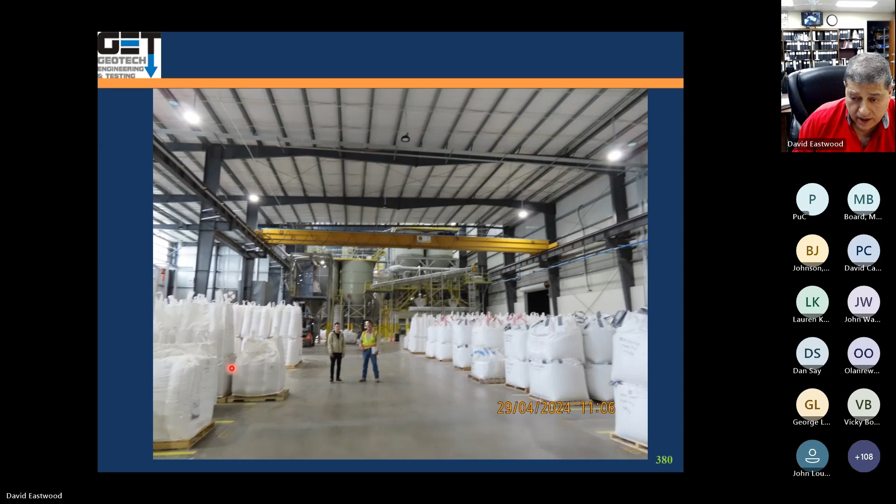Settlement analysis: when we look at the building, in the floor slab, heavy materials were stored. We checked the contact pressures, and there was about 600 PSF. We ran the settlement analysis - it was not a big deal, so settlement was not an issue.

Reasons for foundation distress: it was basically a result of poor construction and poor quality materials. These are the two reasons why it failed.

Poor construction, faulty construction as a result, indicates the presence of many cracks throughout the floor slabs. Lots of cracks. Examination of the floor slabs indicates rebars were located all the way down on the concrete floor slabs.

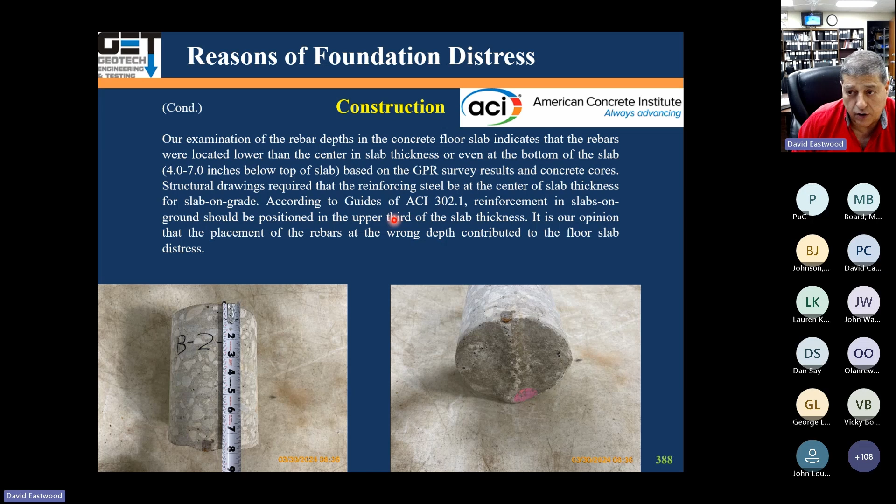Essentially, rebar was supposed to be at 3.5 inches - it was not there, so reinforcement was totally in the wrong place. Control joints were supposed to be about 15 feet apart; they were as much as 25 foot spacing. So that's improper control joint placement.

The cores were 6.6 to 9.4 in thickness - it was supposed to be 7 inches. So it doesn't meet specs for ACI.

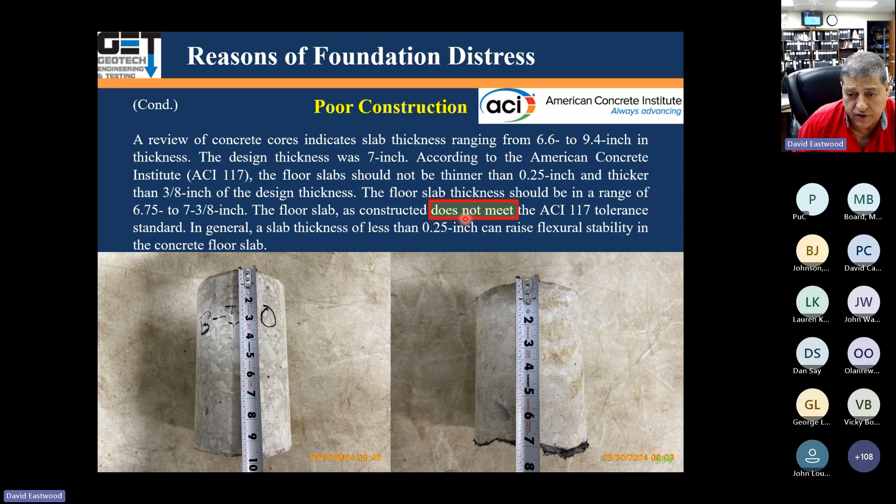Poor quality material: we ran all the compression tests on the concrete. It's supposed to be above 4,000 PSI, and the concrete values were as low as 1,850 PSI.

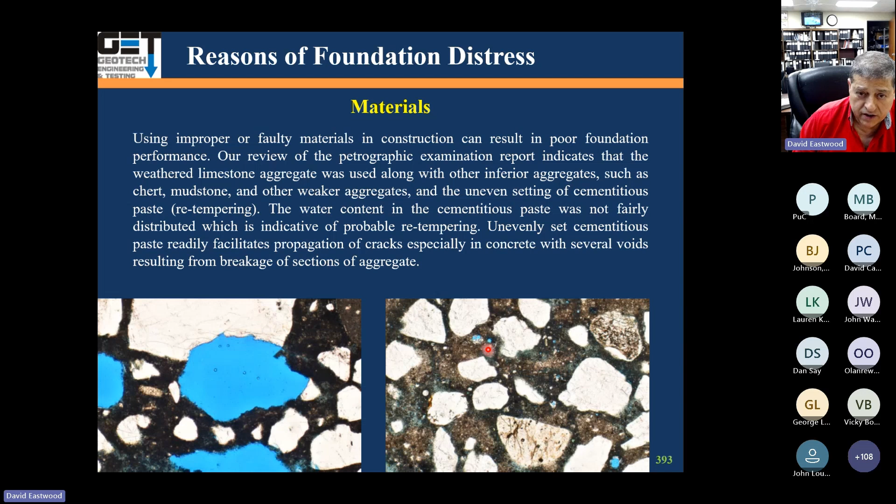Petrographic analysis indicates they used the wrong aggregates - cheap aggregates, weathered limestone, chert, and all that stuff in the concrete. That's why it was so weak. They also added a bunch of water to it during construction, which caused a lot of problems.

Repair techniques: in terms of repairs, we recommended two options. The first option really isn't very good, but you can use crack repair using the stitching method - basically you put these devices in there. Essentially it's called the crack repair option.

It's basically a way to reduce the risk of foundation distress compared to others. It involves drilling holes on both sides of the crack, grouting the stitching dogs - U-shaped metal devices - you put them in there and grout them in.

There are just too many cracks to do stitching everywhere, but if you want to increase the life of the slab, you could do that - do the stitching and grout it.

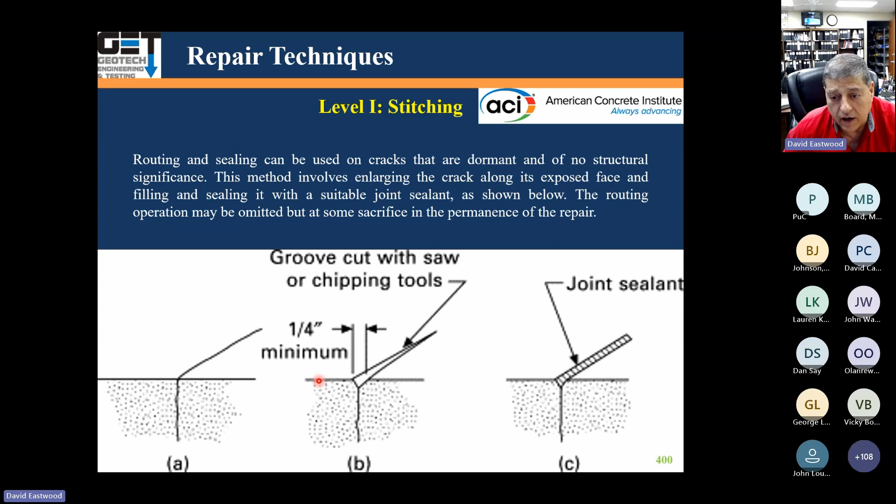You cut a groove and stitch it. The purpose is to put sealant in the cracks, because of course you don't want water getting in there.

Basically, all the repair and stitching should be done in accordance with ACI 224. You can also use carbon fiber for the crack - they use a lot of carbon fiber for crack control, which is pretty good.

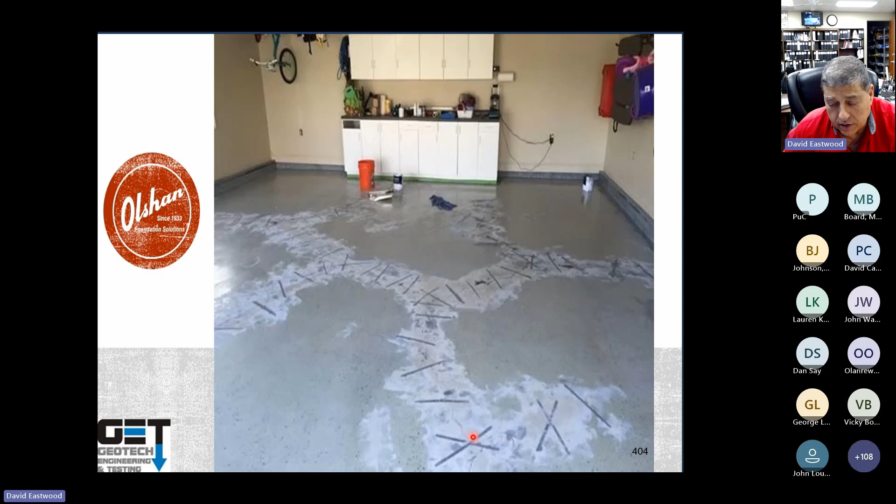For Level 2, we recommend removing the existing paving, putting a new 7-inch concrete slab in, and building it in accordance with ACI requirements.